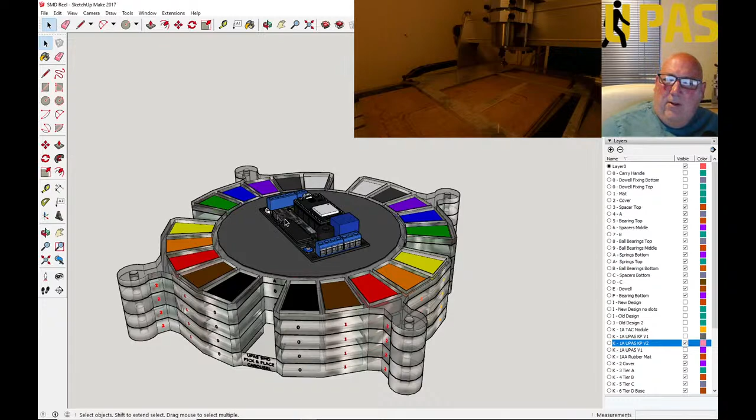It's a dual role device with a mat. Put your circuit board on top, like so. It'll be a blank board, and you can stick your components on, like I've put a few components there.

So in your carousel, you're going to store bits like connectors, resistors, poly fuses, opto isolators, resistors, LEDs, all that kind of small stuff — stuff that you could get lost quite easily or mixed up.

So what you do with this, you turn with these handles here. You move it either way. It's got 4 access points.

So potentially, if you wanted to — it sounds crazy, I know — you could have a small square table with a person on each side, and each person can sit opposite the access here, and you could all populate the same circuit board with different parts, if you want to. Or you could have one either side of the table, or just do it all on your own. But the opportunity is there. This is one of many designs.

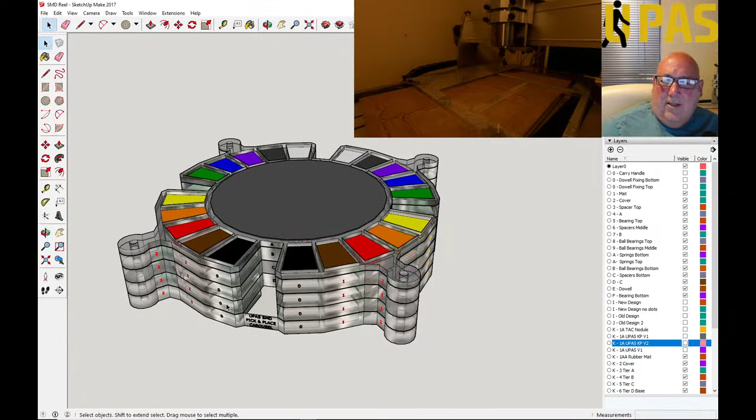Anyway, I've just set up the CNC. I'll select that layer, and we'll just rotate it in case you didn't see. So I'm going to rotate that layer — it's got a ball bearing and a spring positioned exactly where the next one is, and it'll snap into place. You snap it into place. Okay.

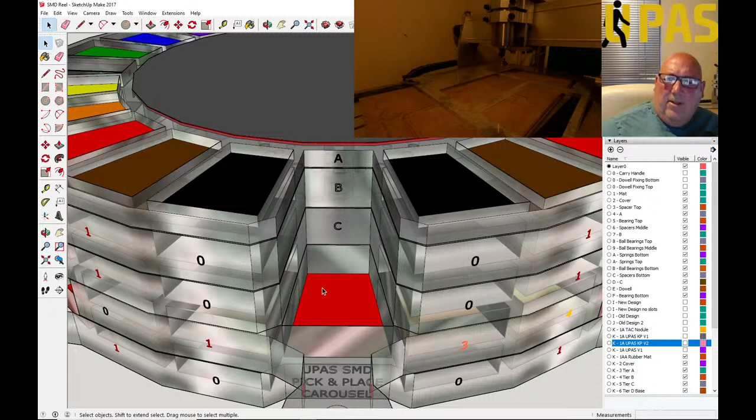So once you've snapped it into place, in there is the bin milled out of the plastic, and it reveals a 10 mil deep bin, by — what have we got here — 18 mil at that end, and 26 mil at that end. So that area, you can fit quite a few resistors, capacitors, LEDs, more than you'd think — you could probably dump a whole reel in there.

I don't know if you'd get 5,000 in there. Anyway, I wouldn't dump the whole reel — I'd just dump enough to last for a few weeks.

So we've got various board houses now — JLC PCB, PCBWay, loads of other ones. It's very easy to get a circuit board made these days. Well, it is at the minute. How long that'll go on for, I don't know, with the present climate, but anyway.

There comes a point where you need somewhere to store your items quickly without having to get all your reels out every time and sort out a few just for one-offs. You don't want too many of these components out at any one time — they're only tiny, if you sneeze they'll blow around, mix up, or you'll just lose them. So it's a bit of an organiser stroke building machine.

You can build it on there. Now, it's based off Unexpected Maker's 3D printed version of it.

That's where the idea came from, and I need one. I asked the question, where can I buy one? I wanted to buy one, but the design files are available. I didn't see them, but they're available somewhere, and you've got to make your own basically.

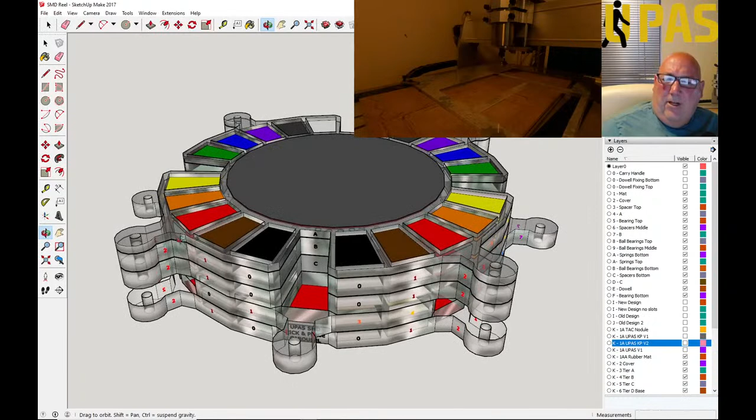But the idea is you get your tweezers, you put your circuit board on, and you turn this, and you just get your tweezers and you pick out your part, you place it, and then you spin the reel. You can spin the reel or move it around, pick out another part, and so on and so forth.

But it gives you, the way I've done it, there's 5 there, 5 there, 5 there, so that's 20. Each tier has got 20 bins.

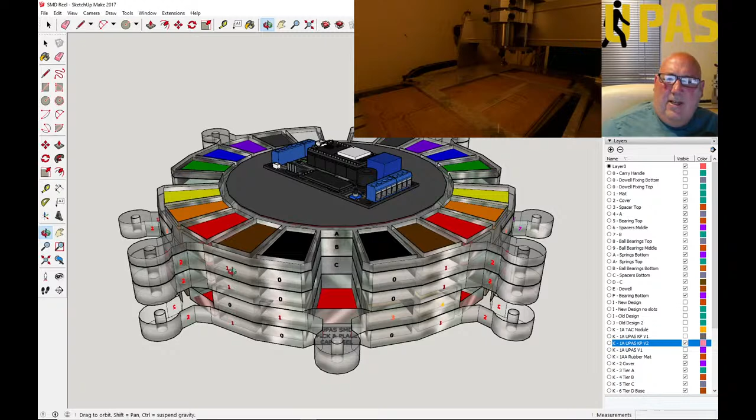And you got another, so there's 80 bins at 10 mil, and then you've got these top temporary ones, so I call it temporary parking, where you can pick out your items out of the big bins, or the 10 mil bins, and place them onto these 3 mil bins, temporary if you want to do it that way.

You could pick out enough to do, say if you're doing a batch of 10, you could pick out enough items from each one to do 10. You could place them where, you know, in a certain order.

This colour follows the resistor colour code, so if you did it in steps, you could say, right, step 0, I start off with such a value. Step 1, I start with another value, and you just go around. This is your anti-clockwise direction, or it's actually clockwise, isn't it, if you look from above? But you know what I mean.

Anyway, all you'll end up with is a clear polycarbonate. I could laser print some different coloured card and stick it in. It's just to illustrate the different bays, really. That's what the main thing is here.

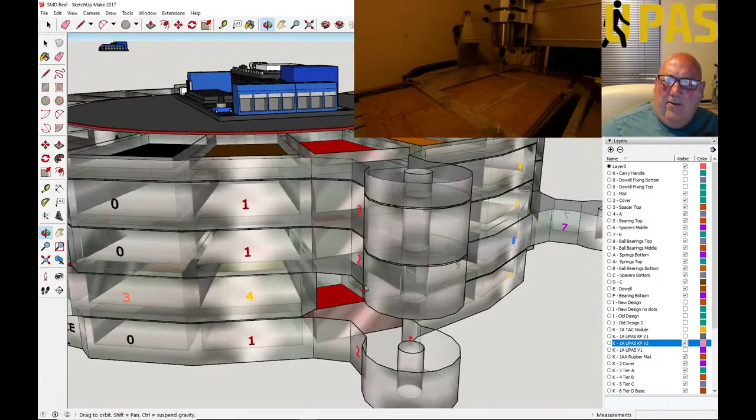So yeah, it does give the ability when you move this to reveal other bays, not from above but from the side. Whether that will be taken advantage of or not, I don't know until we come to the real one and see if we need to do it.

It's not so easy down there, but say if I undid the rotation. Let's get rid of that, I don't want this to take up all this time. So if we move that, if I just move it back one, for instance, and let's move that one, forward one, forward two, yeah.

Right, so you can see what you can get to now with your tweezers. This is on your desk, so you could get into there, and you can get into there, and get into there. So just from a couple of moves, gives you access to different bins.

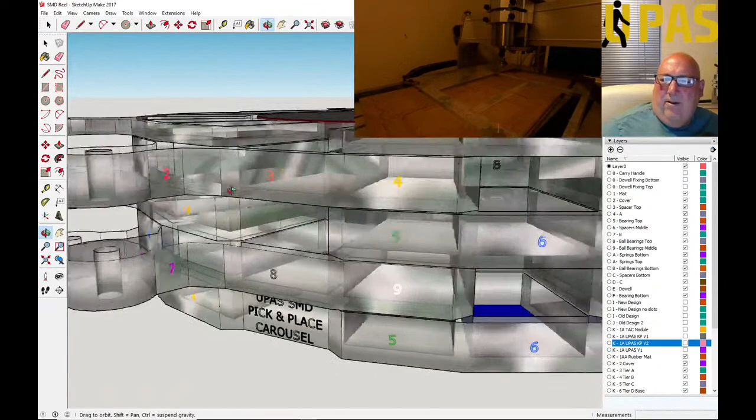Don't know whether that's going to be a good thing or a bad thing. A lot depends on what you're doing. Because it's got symmetry, you can get the same bins, the same position bins available around. So you could generate a pattern anyway. It could even be a game. This could be a game, some kind of cryptic game anyway.

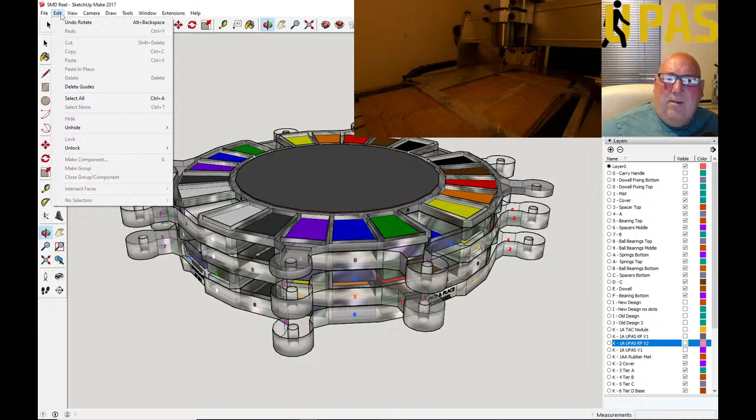Right, so let's put that back as it was. Hang on, I've gone right round too far. Let's get this back to where it was.

And today we're gonna build the first base, hopefully. Don't know how long it's going to take, but we'll give it a go.

It's been very hot in the UK today. I think I've got a bit of sunstroke and sunburn on my head, so if I stop making any sense, you'll know why.

Right then, so up on the view on the window next to my face, that way, you've got the CNC machine. It's a Chinese 6040. I've had it for a while. It's in a bit of a mess, really.

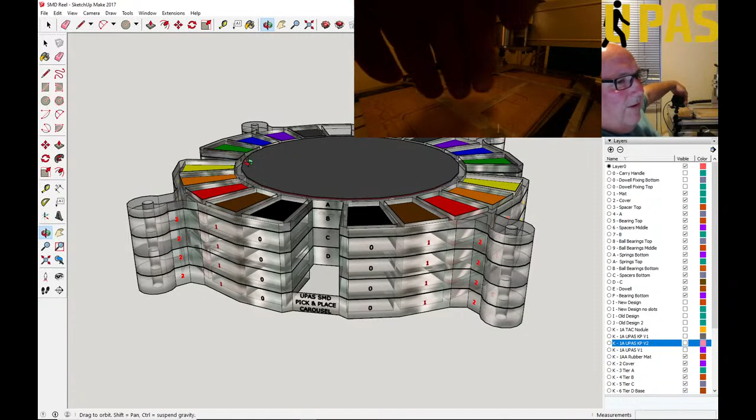Now I've got a bit in from yesterday. I've got a GoPro camera on it. The picture's not brilliant, and there's a bit of a lag. So watch this, my hand's in front - that's the lag, see the lag?

Can't get rid of that at the minute, so I can either get another camera - I've got another rig upstairs in my electronics lab, but I don't want to start undoing all cameras, so I'll just set this one up for now.

Right, there's a bit of scrap plastic on there. Managed to get the bearing to sit in the last bit of plastic I did. I can't remember where it was now. Was it over there? Yeah.

So I've got the bearings - this is the crucial bit, these bearings. They're 12mm wide, the outer diameter is 12mm, the inner is 4mm, and they're 4mm thick. So the top layer of my plastic is 5mm, but the top layer isn't having a bearing. That top one is 5mm and the rest are 12mm, so the rest can take a bearing or two bearings.

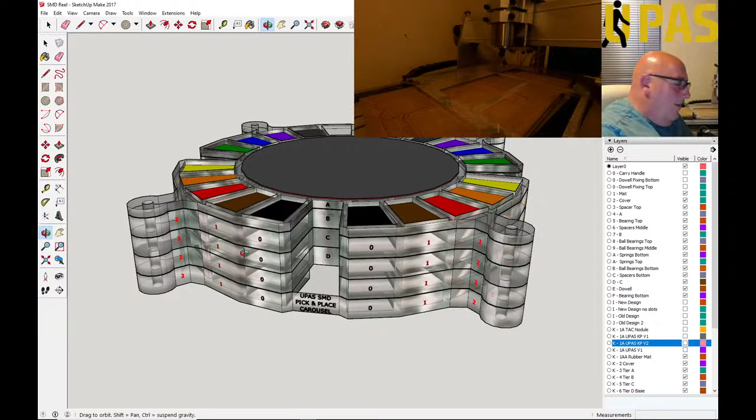Anyway, I've explained all that before. So what we're going to do now is mill out - got to alter the G code slightly, just on the bearing section. So let's just get back over to, hang on.

The models also contain the flattened model ready for creating a G code. I've got them in steps 1, 2, 3, 4. Now that is the first step actually. Now, do I want to go ahead and cut it out? Not really.

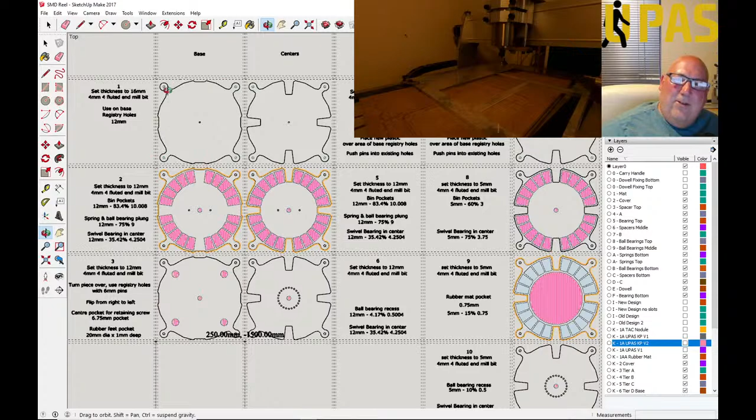Oh no, sorry, I wasn't cutting it out there, was I? Yeah, because as soon as I cut it out, I've lost the clamp. I've got to clamp the plastic down. So the first thing I'll do is create the 4mm hole in the middle.

Now, a bit of a problem with that 4mm hole. That's probably alright there. Probably be fine as it is. So I'll leave that as it is. If it's wrong, I can always go through it with a drill bit and open it up. But I think it's right as it is.

I can either do that because I have changed since I created all this - I have changed the size of the bit down here. 3.90 the bit. It says 4mm on the end mill, the 4 fluted end mill, I think that's what they call them. But in reality, to make this cut big enough to drop that bearing in, I need to make the bit diameter 3.9, so just to give it a bit of overcut.

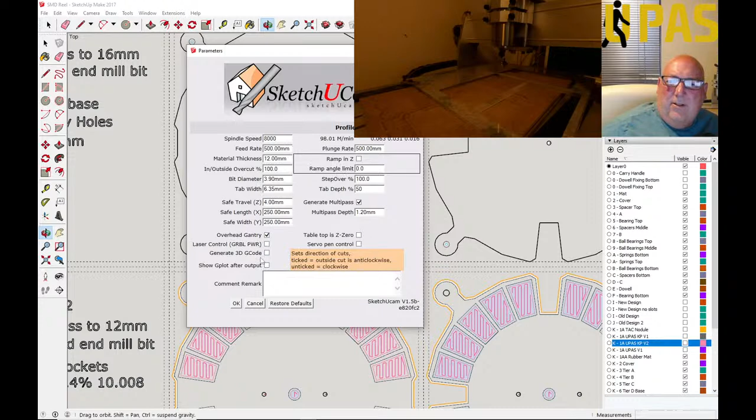So we did that last time, so we're on 12mm here, that's okay. Now I could just go through - I'll tell you what we'll do. Why not? Well, let's do it. I've got to just delete that.

Here we go, it's just a slow process, sorry. Now, click on the rubber, delete that. I'm gonna - not that bit, that bit. No, that's the wrong one. Hang on. That's it, delete that. And now we've got the new bit.

I'm going to place a plunge over the top of that. So I'm going to plunge it - that'll plunge straight down, in steps of 1.2mm, down through the plastic, now 16mm thick. Okay, 16mm thick.

Right, we're getting very thirsty now. Excuse me. Got some ice water. It's been too hot today. I've got a bit of cider in the fridge, but that's no good drinking that in this heat.

Okay, so I've got that in there. It's going to mill out these as well. Now these are 6mm, so I probably need to erase them as well, to tell you the truth. Let's just do them as well.

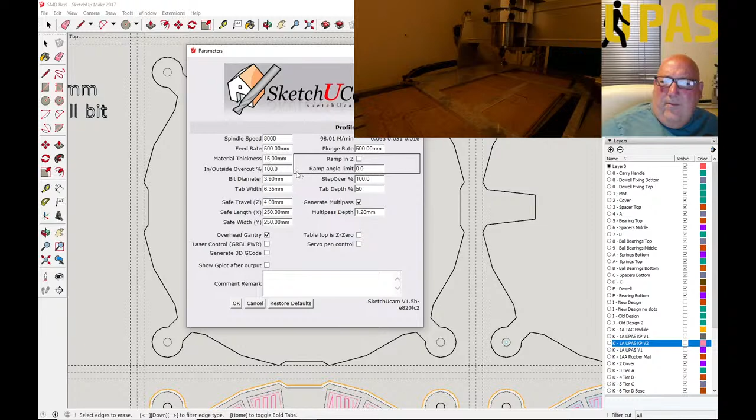I'm having to go over it slightly, so I've done the middle bit. Now I said it was 12mm, but I need to go past the 12mm into the material, so I'm going to have to pretend this is 16mm. Should I say 16? Let's not say 16. Let's say 3mm depth, so let's say it's 15mm thick. 15mm thick, that's it. It's not, it's only 12mm, but I need to go through the plastic into the spoil board.

And I'm going to use these holes as alignment, so I'm going to need to flip it. Once I've milled this out - not at that point, but later I'll need to flip it - and these are exactly the right distance apart, supposed to be. So let me do an inside cut with the new size.

That's 1, 2, 3. The first thing I need to do is mill out these 6mm holes all the way through the material, 3mm into the spoil board. This I don't need to do now, but I'm going to get it out of the way. It's a 4mm hole straight the way through.

Okay, that doesn't matter if it goes 3mm into the spoil board, doesn't matter. So let's do that. That's the first stage. Right, okay, let's get the safe area over top of it.

Okay, that's snapped to the safe area, so I'm going to save that. I've got to go through each one because I created some of this G code with the drill bit set to the right size, but it turned out it needs to be slightly under. Okay, so let's generate the G code.

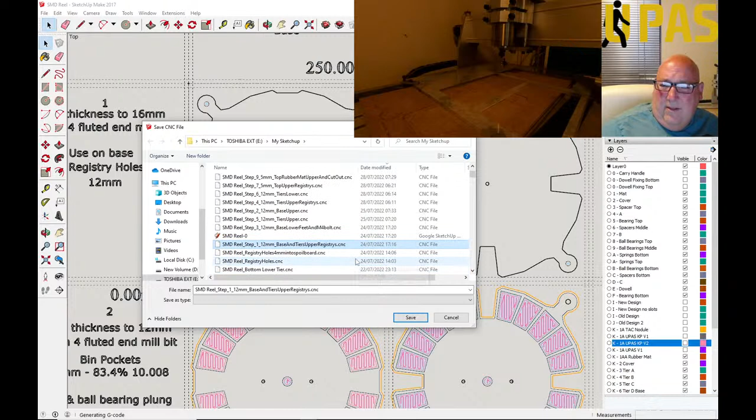I've already got these numbered ready to go, so this is going to be base and tiers upper registry. That's the one. Yeah, that's the one, isn't it? Hang on, yeah. So save that.

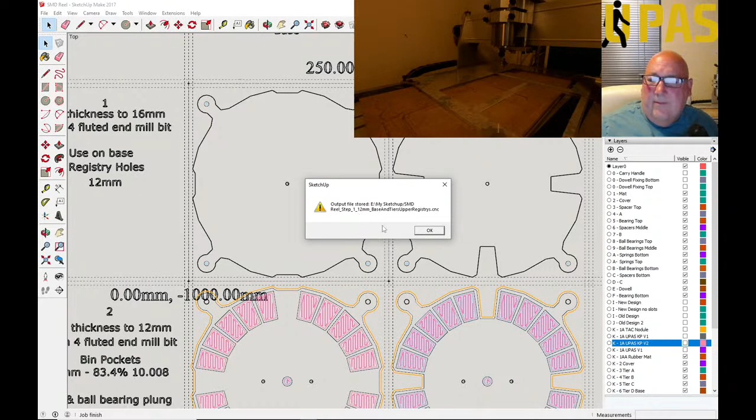Okay, I'm back to square one again, where I need to keep swapping the memory stick. Right, it's created the file. Hello, still there, yeah. Alright, so it's created the file, let me just bring up that. That's okay. Right, I'm going to transfer that file over to the memory stick.

I can do the next one while the one's milling. Well, it won't take 2 seconds to mill one out, so maybe I shall do the two. Tell you what, I'll do the two in one go, why not? Because this one is only a couple of holes, it's not going to take long at all.

Right, hang on, where's my? I've got to find out where I am. Mine's working at slow speed today. So that's the one there. Copy, I'll leave that there for a bit. Let's do the next one, get it ready. Right, this is the next one in the list for the base. Now,

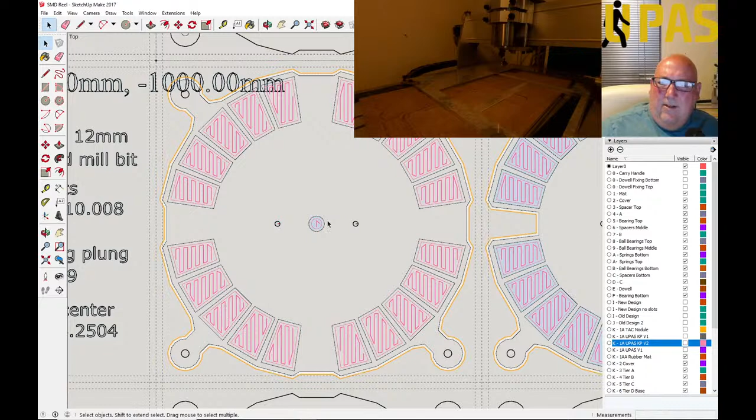Yeah, this is where I need to delete these holes and redo them. Now some of these don't go all the way through. Well, no, none of them do, apart from the outside bit. Now this is the bit, yeah, I'm gonna struggle a bit. I've got to be so careful, because I'll end up milling too much if I make a mistake.

Might be better to split, if you're doing one yourself, split it up into stages. So I've got 2 or 3 things going on here. Got the pockets to mill out, different size pockets. Well, there's 3 different size pockets there. Let's go with it though. Right. These are going to be okay as they are. I'm not bothered if they're a bit tight. Yeah, I suppose you could want them as. Let's go for it, let's just go for it.

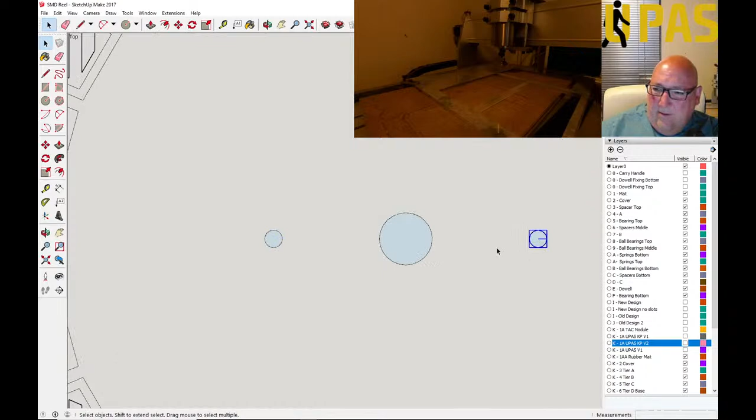Right, so I'm going to select all this. I've got to just rub out the G code side of it. Which means I've got to take that out of there. I've got to take that out of there. Now, is that the one? No, that's the one, and that's the one. This is a bit more complicated because I've got to delete these. Alright, that's okay, it's just going to take a little while.

Sorry, let's talk about something else.

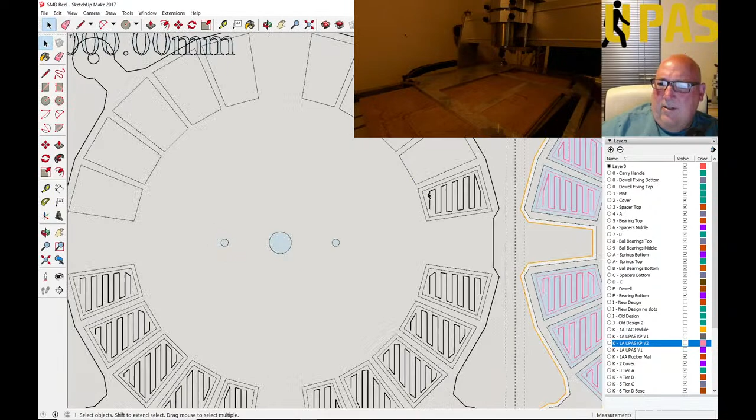So, anyway, I've picked up a bit more wood for my 3D intercom project, which I've had to put on hold while I'm building this, because I need this at some point, so I thought let's get it out of the way. So I've put on hold my ESP32 audio video intercom project. That's getting a few views. I'll get even more when I start integrating the software and firmware on it, hopefully.

Right, so I'm going through, I'm just deleting this. These are the tool paths that the Phlatscript creates when you... I'll show you in a minute when I start putting them back in again. It does it all for you, it's just it doesn't get rid of it for you. No trouble, it puts it in for you in one piece, but getting rid of it is slightly tricky if you've got lots going on.

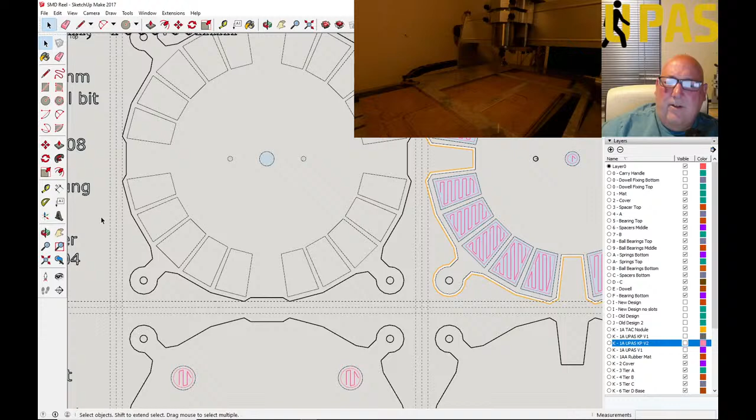Right, have we finished? Yeah, we've finished. Right, so that's your blank, and we're going to save that there.

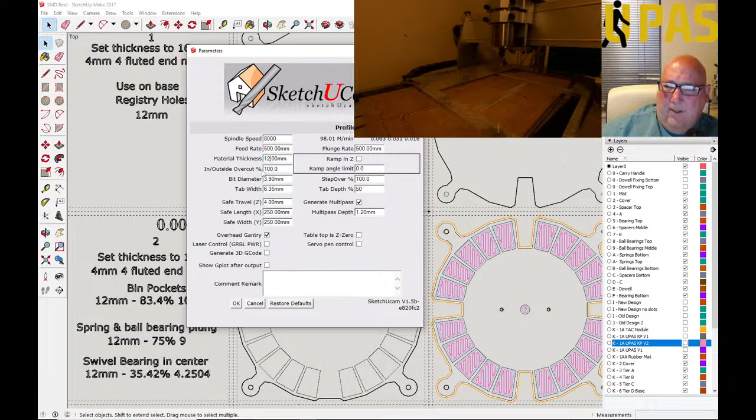So what I'm going to do now is put on my pockets. My bin pockets are 83.4%, and they're 12mm deep. Now I'm going to have to change the material to the actual size, which is 12mm, not 16. So that's going to be my 12mm.

I've already done this one. This will be called a different file. So what I need to do now is, let's get rid of the spring and ball bearing first. Now I need to go down 75%.

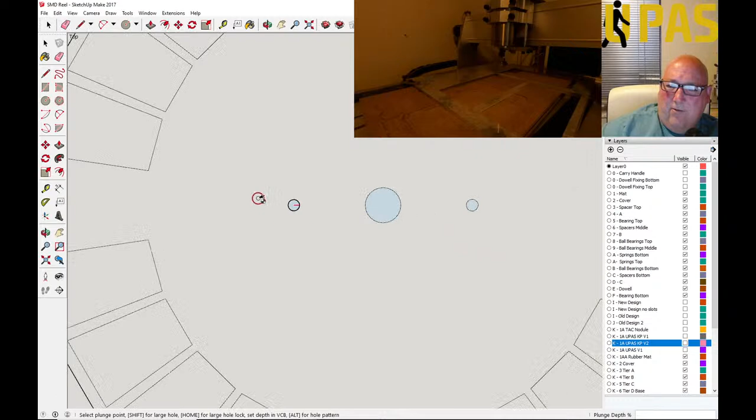That'll give me roughly 9mm. So I'm going to plunge here. This is for my spring to drop into and a ball bearing. If you haven't watched any others, this doesn't go all the way through the material. It goes 9mm through, so there'll be 3mm at the bottom of material left, and I'll be able to put my spring in.

To tell you the truth, it probably doesn't need to go down 9mm. I thought I'd give it 9mm, but it probably only needs to go down a few mil, about 5 or 6mm. We'll keep it at 9mm for now.

So they're done. The next one is a swivel bearing in the centre. This is the one we messed around with in the test plastic behind me, so we got it right. This one needs to be a pocket, swivel bearing centre 35.42%, and I'll click that there, and that's that one done.

The next is the pockets. Let's quickly save this. Now the bin pockets - I could take this opportunity now to make them 11mm, but I'll stick to the design.

So these bin pockets need to be 83.4%. 12mm minus 83.4% gives me 10.008, thereabouts, so that's close enough. I have to do percentage of thickness on this software. I'd rather just do it by the mil, but for some reason they've gone this way. There must be a reason they've gone this route with it.

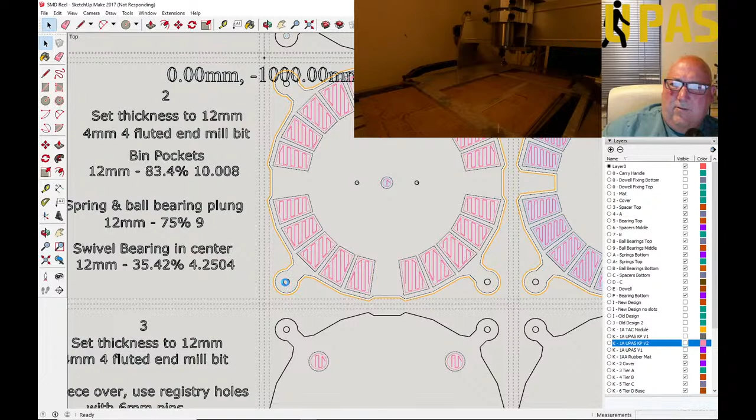Save that. We don't need to mill out these because we've already done them. We've already done these on the one in front, stage 1. We did the holes in the corner.

So that's everything we need there. So let's just bring down the safe area over there. Okay, and save it. And we want to export it. Yeah, so we're going to do that bit first.

Now, do I need to turn it over? Shall I do the next one? That's the base finish then, isn't it, once I've flipped it over? Tell you what, we'll do that stage and we'll flip it over after.

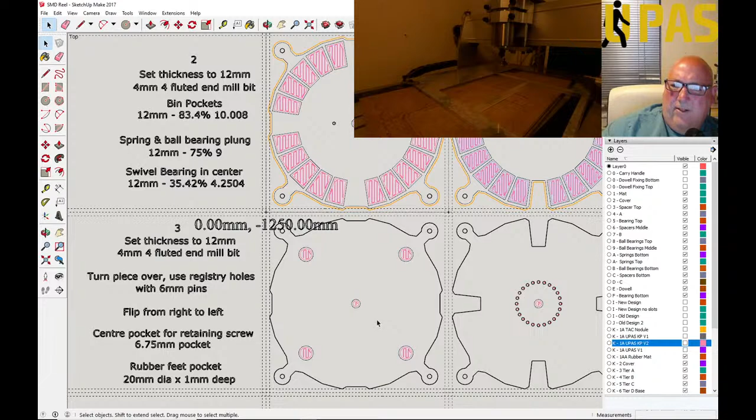Right, that's the material clamped down. 1 and 2 is just clamped down with the normal clamp or vacuum table. If you've got one - I haven't got a vacuum table. And this piece is underneath of that, so it has to be flipped, so we'll leave that off for a minute.

Right, now I've created the G code, did I? Can't remember. Let's pretend - no, we didn't create the G code. So this will be step 2, which is down. Where is step 2? Don't see step 2 on here.

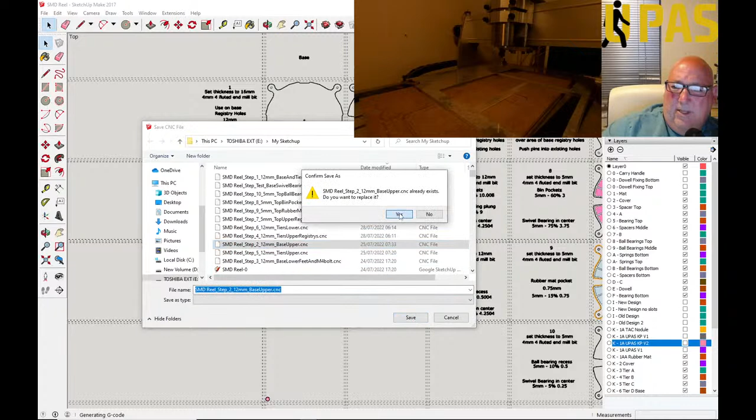There it is, upper base. Yeah, so that's upper base. Right, okay, so we're going to save on the top of that. Okay, so now we're going to go down to the...

Oh, it hasn't finished creating it yet. Have a sip while I'm waiting.

I had a look at the YouTube analytics, and we've got some views on this project in Indonesia. I don't know whether that's Australia or what. Anyway, some in America, some in the UK.

Right, okay, so we've got that. Let's just copy the files over. That one there... oops, that one there, and we want number 2. Where'd you go? Number 2. Can't see number 2 now. Why not? Can't see it for looking. There it is - yes, they both got the 1st to the 8th.

Okay, so I'm going to copy them over to the memory stick and overwrite the ones that are on there. Okay, we're getting closer.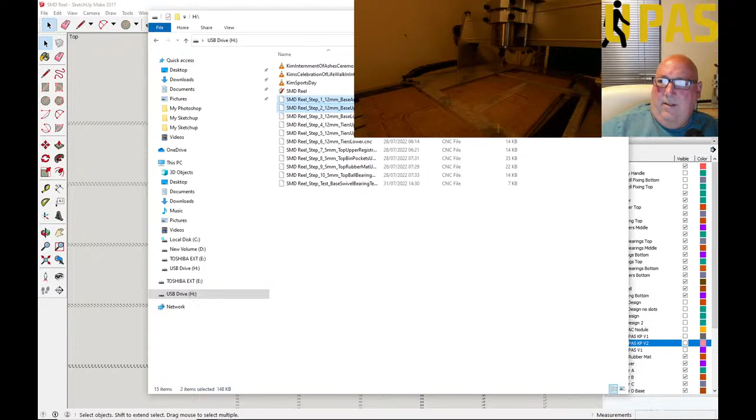Before I go much further with that, let's quickly go over to the online viewer, load in those two bits of code. Let's just see if it's even close to what we're expecting. That's the one there - alright, so we'll have a look at that.

So let's run it. The tools will pick up, go up to the top, and then it's going to mill out the 4 mil hole, then mill out the 6 mil holes. It's going to go down 12 mil and keep going another 3 mil into the spoil board. It'll carry on - looks about right, doesn't it? Yeah, it looks right, so we'll leave that one.

Let's open up the next one. Number 2, where are you going again? It's right at the top. Okay, let's load up this one.

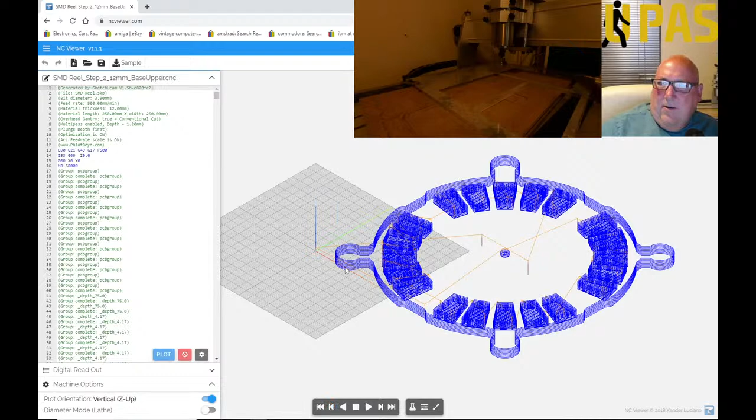You can see there's a lot more going on with this one. So this one mills the bearing pocket for the top, all the bins, and then when it's finished it'll go around and cut the outside up. Let's just see if it's going to do something like that.

Alright, yeah, so it's milling the 2 spring holes, and it's starting on the pocket. It should do all the pockets first, and the outside cut is the last thing it'll do.

Now I've got no tabs on this piece, so I've got to be careful. Actually, I might put the pegs in when it's finished the pockets and is about to do the outside cut. I'll let it cut halfway, then I might have to pause it, put some pegs in the holes it's already drilled out, right through to the spoil board, to stop it moving - because as it cuts the last final little piece it'll try and shift, and this is normally where my stuff goes wrong. It shifts and then the bit just mills into somewhere it shouldn't be.

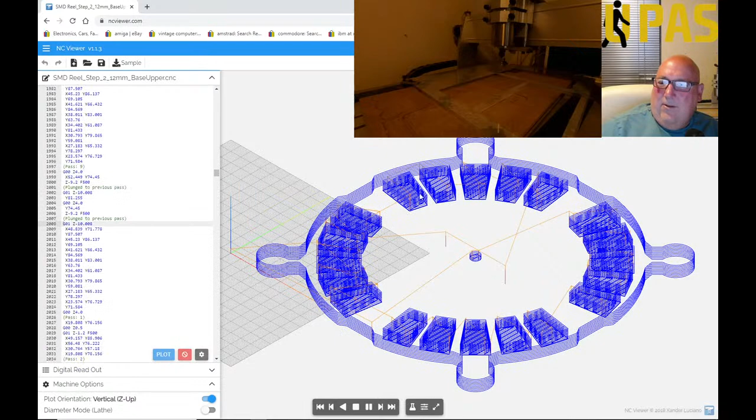Okay, so that looks good. We'll stop that there. Right, so we're done with that for a minute. Let's go over here - do you want to have a look at what we're going to be doing? We're milling this bit, yeah.

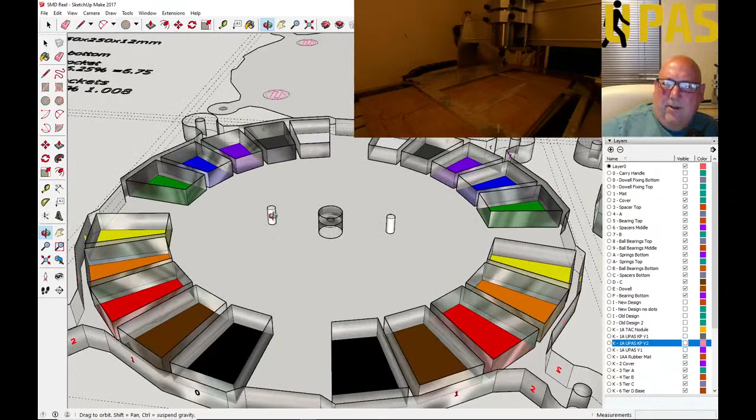Right, this is the bit we'll be milling here. So we're going to do these spring and bearing holes, semi-holes, whatever they call it, that top bearing and all the bins, and then cut it out. But that's the second one - the first one it's going to do is, well, it's not in the right one. The first one it's going to do is that.

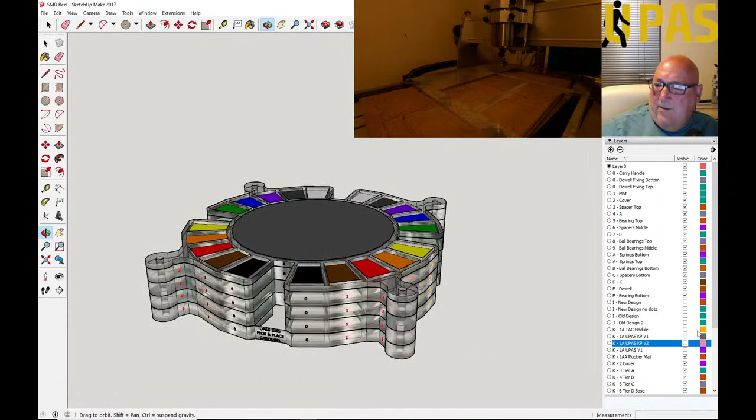Let's just do it - tell you what, let's just do it. Let's get that up in the picture. Let's get rid of some of the stuff so we know what we're milling. So we're not doing the cover, we're not doing the mat, none of the tiers, and we're doing the base. Right, so we're doing the base - there's the two holes for the spring and the ball bearing, and that's what we're milling today.

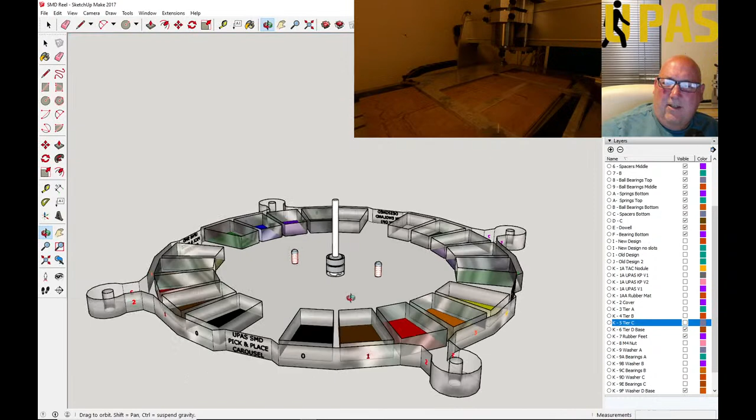Hang on, is that even part of it? Yeah, yeah. So we're milling that - there's two bearings clamped together, holding, and we're doing the top bit today, and the pockets. So we should have something resembling this fall off the CNC table in a while.

Okay, so right, I'm going to take out the memory stick, transfer it over to an XP computer.

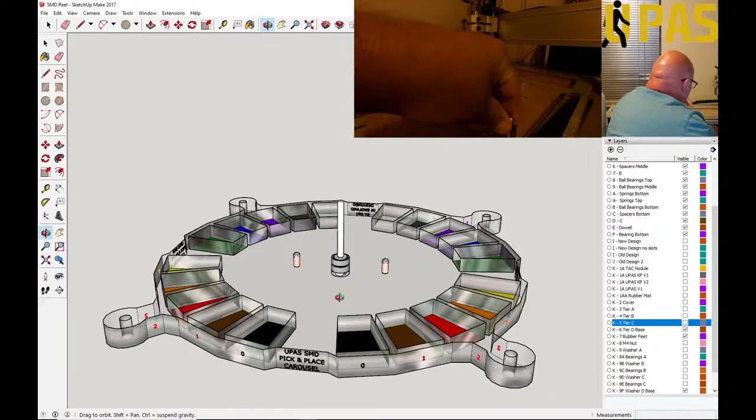Okay, I'm going to hold it there. Now what I've got to do is get the Allen key and take out the scrap piece, just undo the scrap piece. The other stuff's 12mm thick, so I might have to mess around with the clamps here. Let me get this scrap piece of board out, get this polycarbonate out of the way. So you'll have to bear with me for a second or two. We need to unclamp that now.

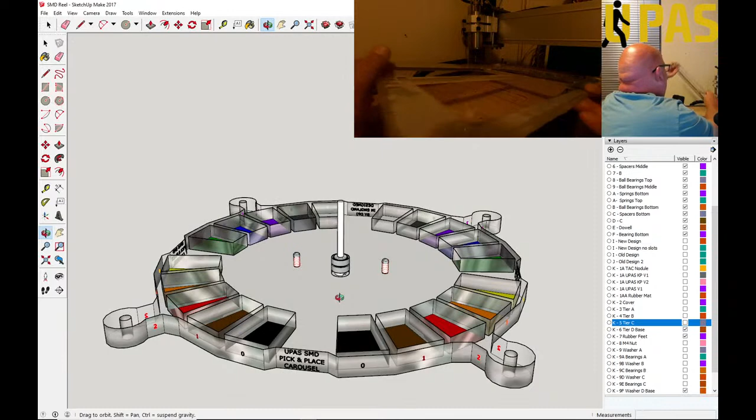Right, the scrap plastic is out. Okay, let's get rid of that a minute, get rid of this temporary plastic. I'm going to turn the vacuum on now, so just got to hoover up the bits off the table bed.

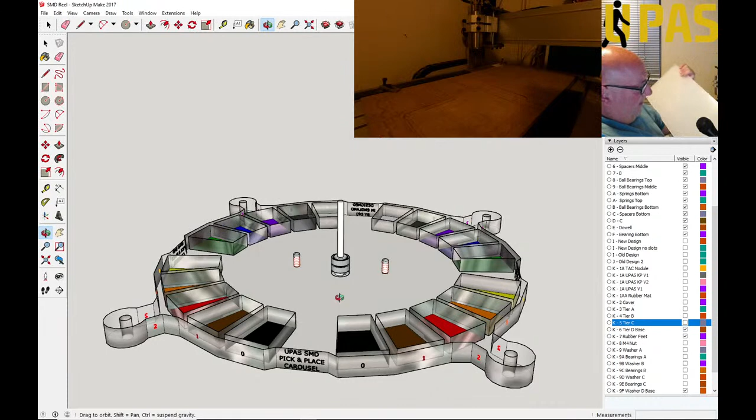Okay, back, slightly back. Right, we get the bit of plastic, first bit of plastic. Like I said, this was here, it is, piece of plastic. I don't even know if it's clear. It might be, it's probably not clear. It doesn't matter. Yeah, it's not clear, I don't think. Almost, it's good enough.

This is 600 mil long by about 250 wide. So what I'll do, I don't really want the plastic on it, really, the plastic will probably get around the bit and foul it up. So I'll tell you what I'll do, I'm going to peel it off. I haven't peeled this off yet. So it's just a bit of scrap stuff I picked up cheap, very cheap.

Let's just take it off. I'm just taking the plastic off. I don't want it to foul up on the milling bit. So we'll just take it off.

You can see it's sort of semi-transparent. Don't know what it's used for, no idea, there's no markings on it. It could be acrylic, it might not be polycarbonate, but it mills well. Actually, I've never tried milling it. I was milling some scrap plastic, probably nothing like it. But anyway, let's just get it all off.

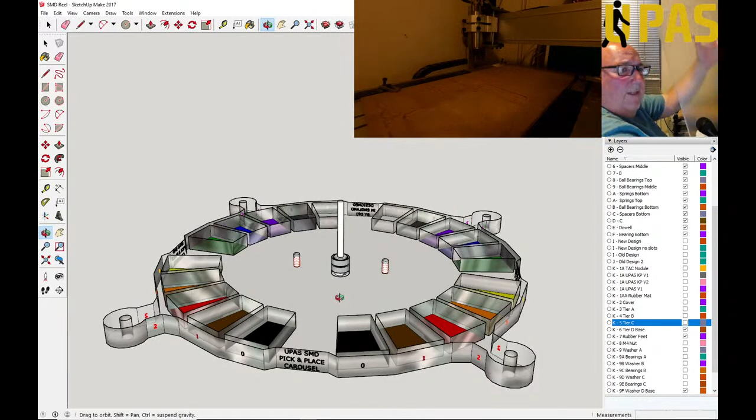Ready, there we go, there's the piece. What's it look like when I'm through it? Don't know what it is. Nice bit of whatever it is, yeah. Okay, put that on the table. It fits on my 6040 CNC quite well, that does.

Alright, my one will only mill about 585 to about 390, 380 something. So, but today we're only milling 250 by 250 in one section.

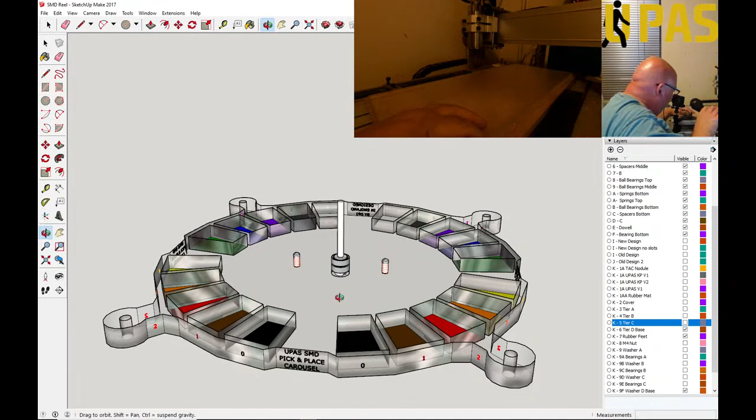Right, here we go. I've got to clamp this on there now. Now, I don't think these are going to be able to clamp it, to tell the truth. And yeah, going to be a bit awkward, that is. 600, so yeah, I've got a bit of gap either side. I can either clamp it either end, I'll probably have to clamp it either end actually. Yeah, I'll give it a go.

So if I put my clamp in there, you can't see what I'm doing. I can just about get that. Yeah, I can just about get that. Right.

Oops, all my power supplies are going on the floor. Slowly, the weight of all these plugs hanging off. Right, yeah, it's a terrible... it's a terrible thing. Yeah, need a workshop, really.

So I've got 43 minutes and we haven't done anything yet. Anyway, right, let's get this other one out.

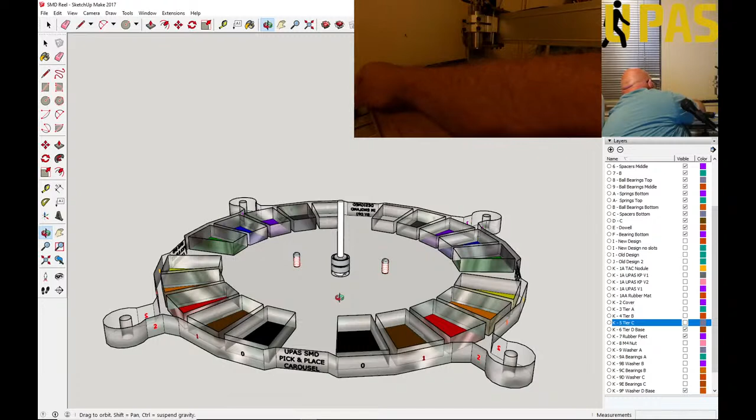Oh, that's come out of there. Why does that one go on? Yeah, I might need some different size stuff here. Should I put one in? That's not really matching out. Why is that? It's getting the right stuff to fit it. That one fits. So why does that one fit?

So I'm just trying to sort my clamps out. I could do with a vacuum table. Well, that would be a noisy thing, wouldn't it?

Okay, so that's okay, that's weird. Anyway, it's very hot as well, very hot today. Okay, so I probably won't be able to tighten these up too tight. Oh dear, I mean, I shouldn't have to.

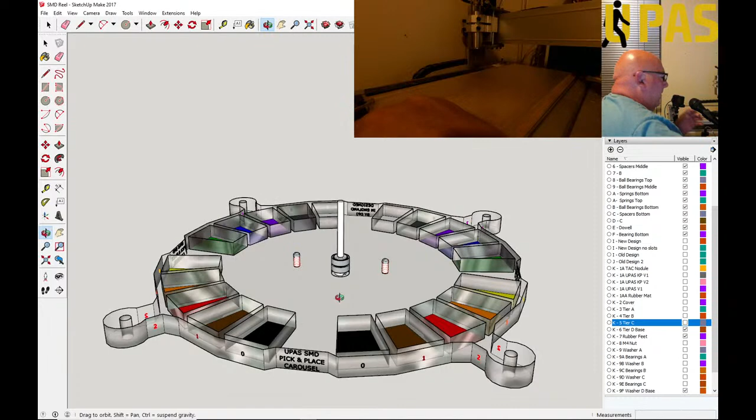I shouldn't have to tighten them too tight, because I'm not going in deep with it. I'm only going 1.2 mil, so I've just got to hold it still, really. So, anyway, let's get this stuff done.

Doesn't actually reach there, so I have to come out of there, put that into the back, and that's a bit of a problem. It doesn't reach over my spoil board. That's a fail, isn't it? That's a bit of a fail. Yeah, I've got a bit of a fail going on here, because my material's smaller than my spoil board.

How am I going to clamp that down? The spoil board is too long compared to the material. My clamps won't reach over it. There always has to be something, doesn't there? Yeah, what else can I do?

I quite like it there, so is there any way I can do it? Hang on, might be able to space it out a bit. No, I can't space that out, can I? Let's just got it there. No, it's not going to work, is it? It's not going to work.

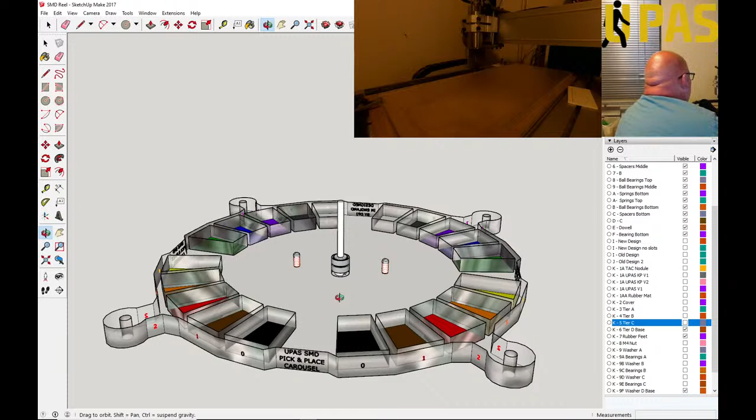So, Plan B. What's Plan B? I don't really know what Plan B is. All it's got to do is mill out 4 holes, but I've got to hold it still in the meantime. Plan B, I tell you what, Plan B will be cut the timber down. I don't have facilities to cut timber down at the minute. Not readily available.

Not in a live stream. Anyway, right. So what do I do? Let's have a think.

I could hold the one side. This is not going to work, is it? If I've got to hold it like that. Okay.

Plastic. Oh, what about if I mill out this over top of the old plastic instead of that? Would that work? That'd make a noise though, wouldn't it? So close and so far. So close and yet so far.

Another drink. Yeah, not really set up. Not set up at all, really.

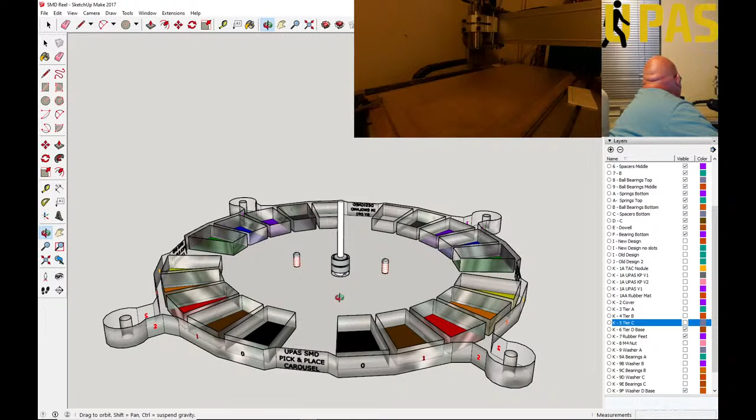Right, I'll have to just tell you what I have to do. I have to clamp it from the side. So I'll go back to Plan Z. Plan Z, clamp it from the side. Just clamp it from the side and try and hold it down. God, that's terrible. Right, okay, let's go with that premise.

So I've only got it. I can sort that out another time. So wind these down. Let's get that there. Get that one there. Yeah, it's a bit of a nightmare. Everything I do is a nightmare. Anyway, right, so let's get that to there.

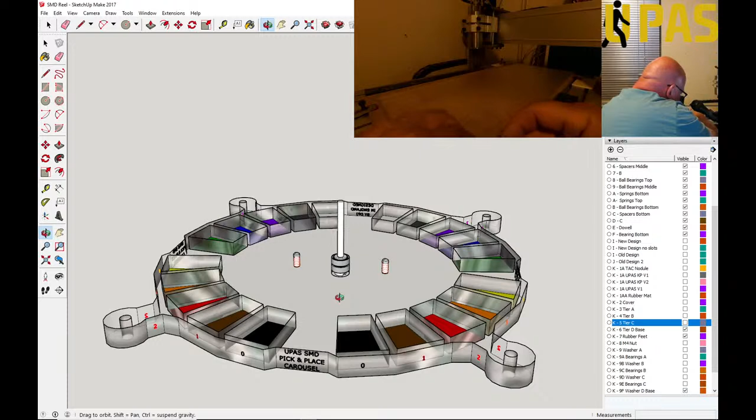So we're going to clamp one side of it and I'll have to press down on the other side. Well, it's going to move, and if it moves then my piece of material is done for. Right, so that's going to go there. I'm going to tighten that up on there.

Actually, I can get 3 sides, couldn't I, if I was clever? Yeah, if I'm a bit clever, I can get 3 sides here. 3 sides is better than 2 sides. Right, let's slide that down there. Yeah, that's it. Yeah, I'm going to get 3 sides.

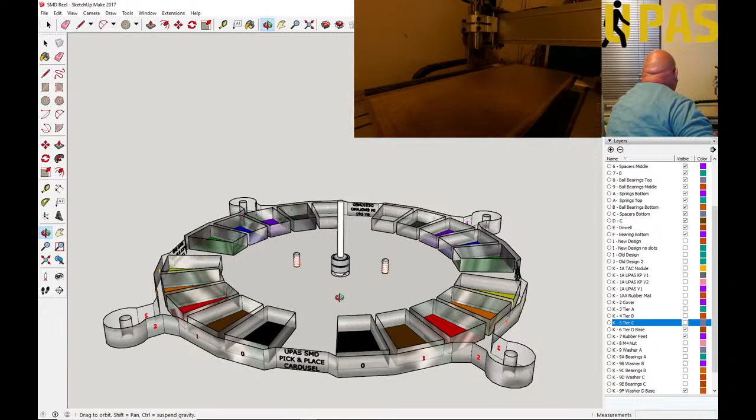Whoops. Blooming hell, they're letting anyone on YouTube these days. They'll probably ban me after this.

Right, let's get that on there. I wonder why that one's shorter. Why is that shorter bit than the other bit? It's like these are different sizes. Weird, yeah, I've got different size threads here.

Yeah, isn't that? Yeah, nightmare. Nightmare scenario, right, okay. Alright, let's get that up there. That's it. Okay, oh dear. Just want to add an extra clamp capability to it.

Right, so I've got something like, and I've got to make sure that we're lined up as well, because I haven't got much play on this. I need to be lined up with something or other. Right, that's lined up with that. Oh dear me, struggle, struggle. Torture, torture, torture.

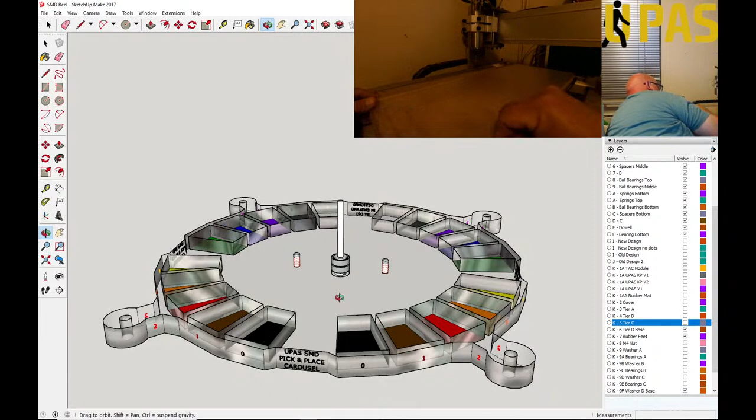Right, here we go, get it lined up. Come on. So lined up with all that down there. Is that about right? Sort of. Okay, that's pretty lined up. Torture, torture, torture.

Anyway, he's got it in for me, because I was once working on a control panel on a site. There wasn't a cloud in the sky, and then came a cloud and stood over me while I was working, hailed on me. Yeah.

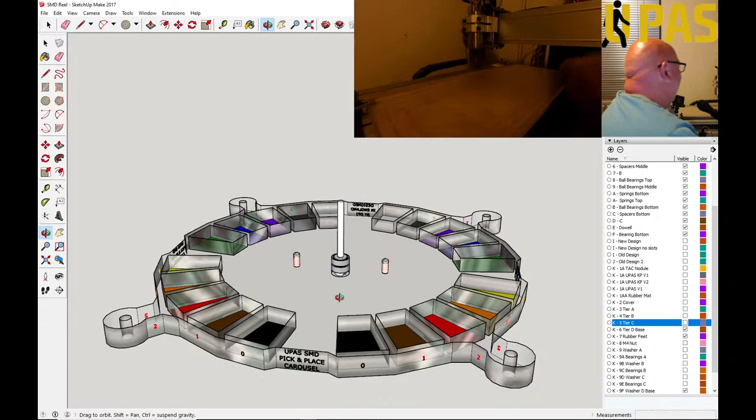Nightmare. Anyway, right, so I've got it sort of held, and I can move the thing, and hopefully it's not going to pull too much, because it's going to cut it before it needs to pull it. I'm going to tighten it a little bit with my Allen key just to give it a bit of pressure. Sometimes tightening it too tight starts to warp the material, so you don't really want that sometimes, but I'll give it a little bit.

The main thing is you don't go through to your aluminium CNC bed, just go through your spoil board only. You can go through your spoil board, but don't go through into your bed. If you go down into your bed, it'll end up looking a right mess after a while, like a bit of Swiss cheese, full of holes in it.

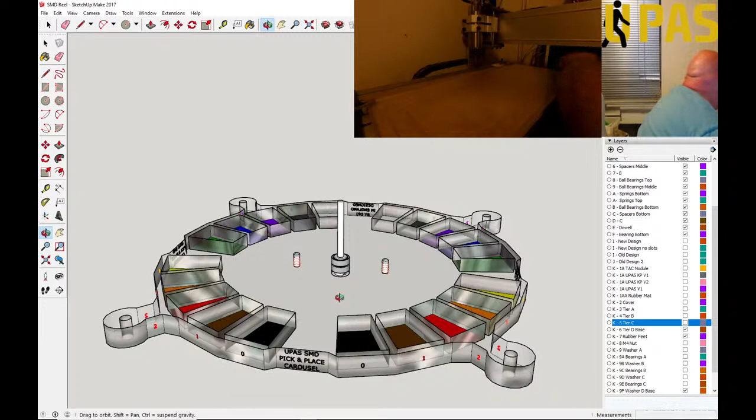Okay, that's going to be about it for that. Alright, if I'm still streaming, it'll be a miracle after knocking all these power leads around. Anyway, right, I'm about ready to... what I shall do now.

You can't see this bit. Shame you can't see this bit. Anyway, right, you can see the milling. That's the main thing. Right, I need to reference.

I've got 600 mil, I need 2 lots of 250. That's 500 mil, so I've got 50 mil at either side to play with, sort of. So I need to bring this, I need to bring the bit... let's just go up a bit.

Alright, so I'm going right to the edge. I've allowed 5 mil on my design. I need to come right over about there, so it'll give me 5 mil. It'll start milling, I don't go any further over.

Now I want to go to the edge about there. I'm putting the centre of my bit on the edge of the material. Right, I'm just going to feel that there now, and I'm going to send my Y all the way across, all the way back now, because what I'm trying to do is see if I'm lined up at the back. The last thing you want to do is start milling off the end of the plastic, which that is doing a little bit.

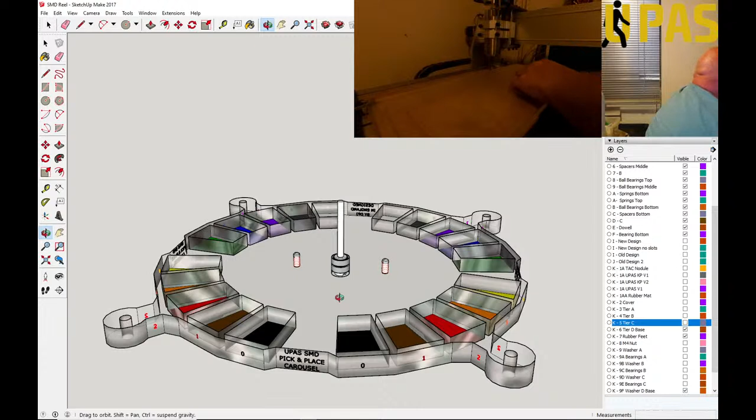Okay, it is sort of doing a little bit, so I've got a bit of play. So I'll leave it there, that's fine. I've just brought it over a tiny bit. Right, I'm gonna go back. Yeah, no, I'm gonna say that's my absolute minimum there. I'm gonna X and Y it there.

Zero the X and Y on the soft limits. Right.

Okay, my Z now, I want to do my Z in the middle. So I'm gonna come back. It's gonna be 250, half of 250, 240, so it's 120. So I'll come back 120, 125. Right, that should be centre where that is now.

I'm going to bring it over 125. Alright, I'm 100 roughly, and I'm going to drop it down.

Now I just want to touch the material, and I want to get a piece of... I can't find it, what have I done with that? A piece of paper. And I don't want to be able to put that in.

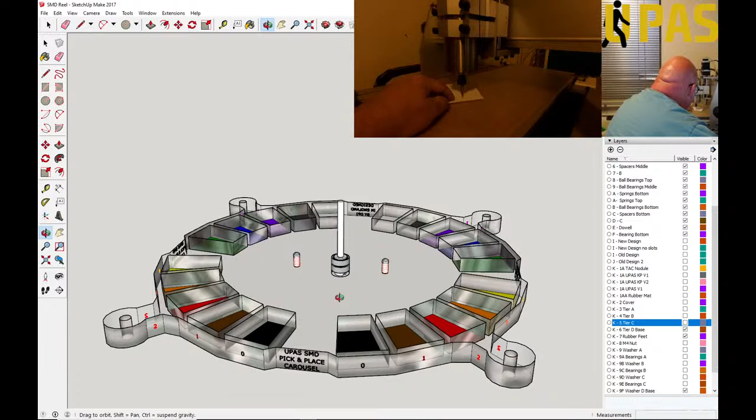I want to go slightly lower than I think I want to go. Let me just go up a tiny bit. Alright, so that's that, I'll lower it slowly. I'm just inching it, very tiny bit.

Right, that's about it I think. That's a little bit too slack. That's a little bit too tight. A little bit too tight. A little too tight.

Right, I'm going to do it. Hang on, it's too tight still. Let's start a fresh bit. Too tight. Yeah, that's going to be it.

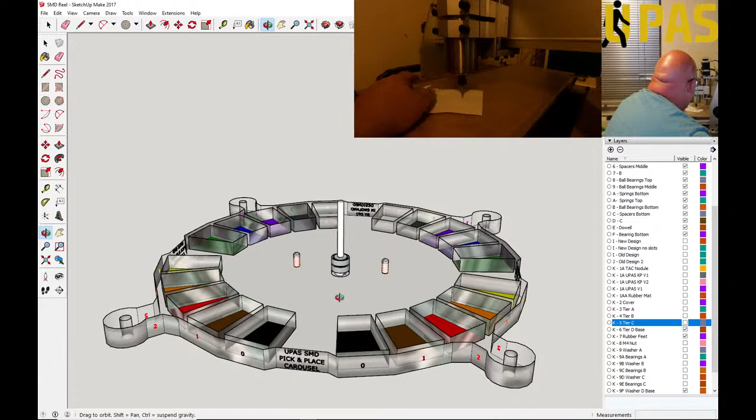About there, right, I'm going to do it there. So I'm going to reference the Z there. Okay, I can still spin my paper, it's just dragging, see that? It's just dragging. Okay, so I'll get that out of the way.

Right, I'm going to go up, I'm going to reference it, go to Z. Right, so this is my XY zero position. My X, Y and Z on my soft limits are all zeroed out. Okay.

So we're going to have a go at that, I think. Yeah, right, it's time to start the spindle up. Yeah, time to start the spindle up. So I'll tell you what, let's load some G-code first. Load the G-code, and we want to come out of that, back into that. Right, so we're going to load that one.

Regenerate the toolpath. Okay, here goes nothing then. Right, everyone ready?

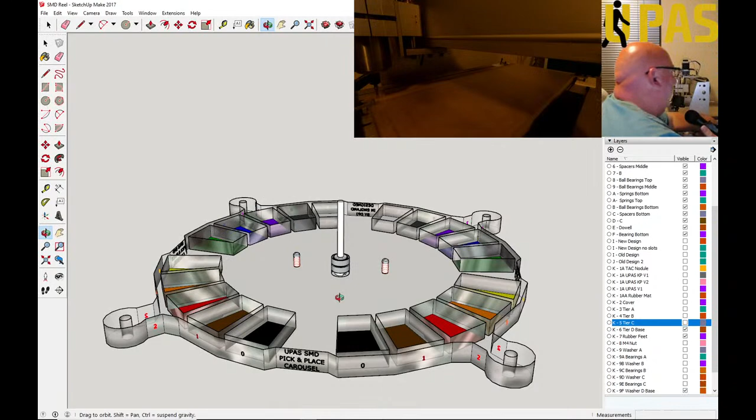Let's plug in the spindle inverter supply. It takes a few seconds to pipe up. There it is.

Okay, I might have to pulse the vacuum on and off just to get rid of some material. Sorry you can't see the screen very good.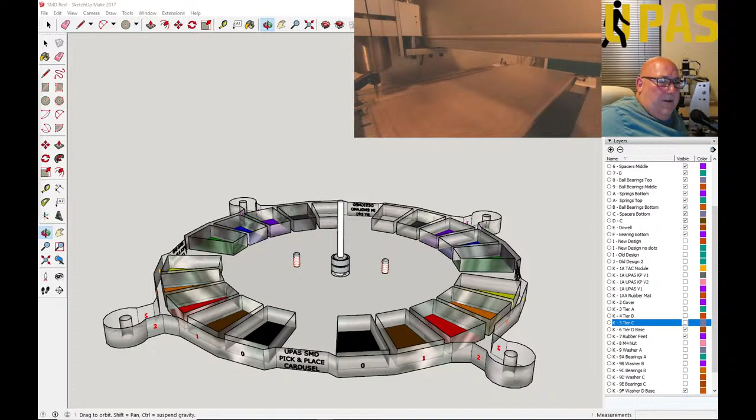Okay. Right, so we are in fact ready to go. Let's turn the spindle on. So we see what a disaster this is going to turn out to be. Right, let's go for it.

Regenerate toolpath. We're already set. Here we go then. Let's see what happens. Ready? Cycle start. So, yeah.

I'll get ready on the stop button. Now this is drilling the 4mm hole for the thread. Supposed to be.

It's gone through. Should start. Hopefully it won't go all the way through to my bed. No. Right, it's going to do the registry holes now.

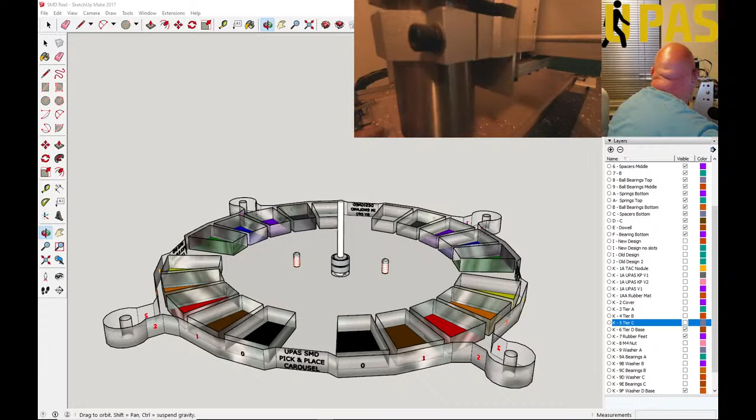The bits of plastic are dropping on my hand, it's quite hot. Alright, one more hole. For these small bits I don't really need to get the vacuum out.

Alright, stage 1 is complete. So tell you what we'll do, I'll just try a bolt. I'll tell you what, we'll move the gantry. Move the gantry back. Okay, that's out of the way.

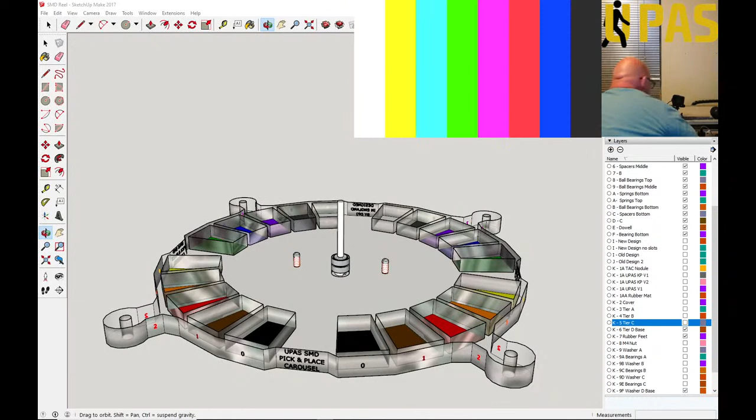I'll get the vacuum out, we'll just vacuum. I'll turn the spindle off a minute. Alright, spindle's off. Let's just get the vacuum out. Okay. Sorry about this, but it's got to be done.

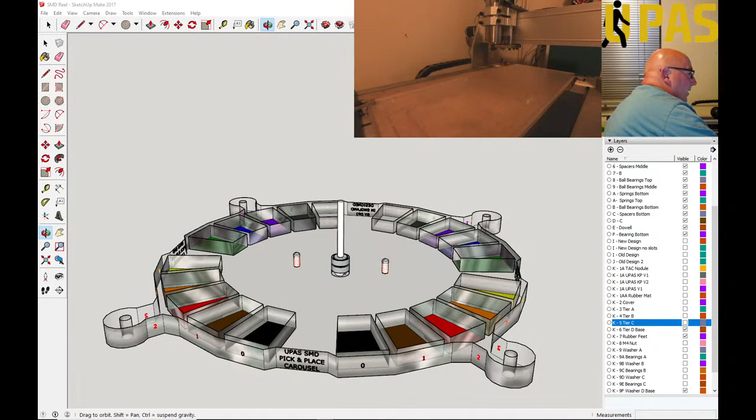Okay, right, it's looking okay. I tell you what, the proof is in the pudding, or the test. Let's pop a fixing in one of the holes. It drops in. It drops in.

So let's see how far it goes in. It goes in that far, which is 3mm into the spoil board. So that's the fixing there. So I've got my 4 fixings. I won't put them in yet.

So we are ready to mill out the second stage. Let's load up the G code for the second stage. Number 2, upper base. Okay. Now this is the one that's going to take a while.

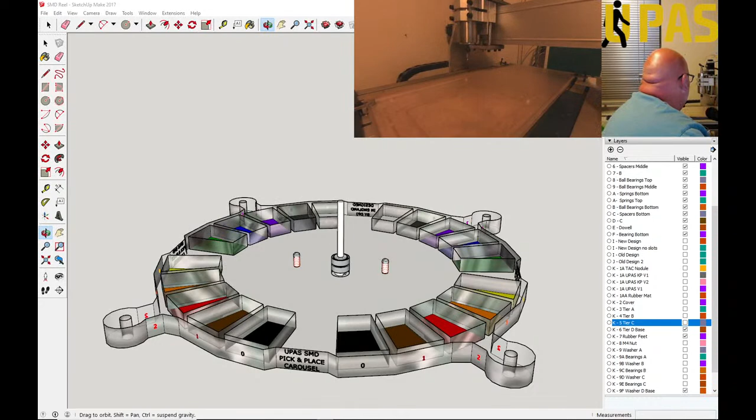Right, I'm going to send the milling head spindle back to Z, back to 0. So off it goes, back to the start position again, and hopefully, if everything's gone to plan, this will carry on milling exactly in the right positions. If everything's gone to plan.

It just certainly looks like it has. If not, I'll need to go and find more plastic from somewhere. It's not the end of the world, but right, I'm gonna go for it. Ready? Spindle on again.

Now this is going to take a while, this one. I think it used to tell me how long was going to be left, but I'm not sure. Or was it how long it ran for? Right, I'll regenerate the tool path again.

Okay. Right, here goes nothing. We're going to go for it. Alright, I will have to keep going at it with a vacuum to empty out the pockets once it starts doing the pockets. Right, here we go. Starting. Ready? Nothing else to do.

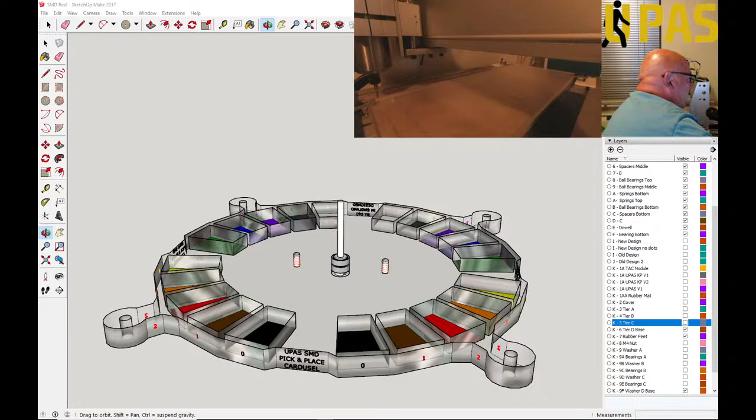Let's hope I don't set fire to anything with the heat. Right, it's doing its own position. I'll get ready on the vacuum. I'll have to do intermittent vacuuming.

Alright, it's doing the ball bearing and spring holes. It is moving a bit. The gantry's sort of moving a little bit, but it's not that critical. It's these plunge holes, they're a little bit fast.

Right, what's it doing next? Pockets now. Right, it's doing the first pocket.

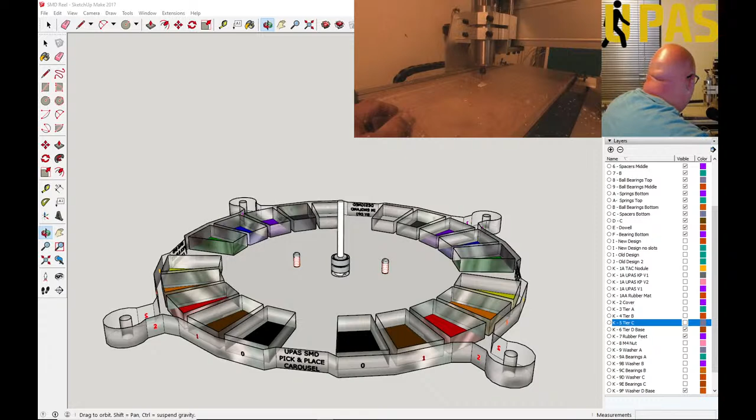Yeah, so make sure it's doing 1.2 mil a pass. This could take a while, as you can see. Really, my camera should be over that way, really, so never mind.

Oh, we've just got to let it get on with it, really, now, you know. Could it keep hoovering it up, but it's just going to go everywhere anyway. Yeah, I don't know if I want to get the hoover out every few minutes.

It's done the first part of the pocket. It looks a lot smaller than what it does in real life on the drawing. Oh well.

Yeah, I can smell the plastic. It's a weird oily plastic, this is. I suppose I should have got a fire extinguisher ready, I suppose.

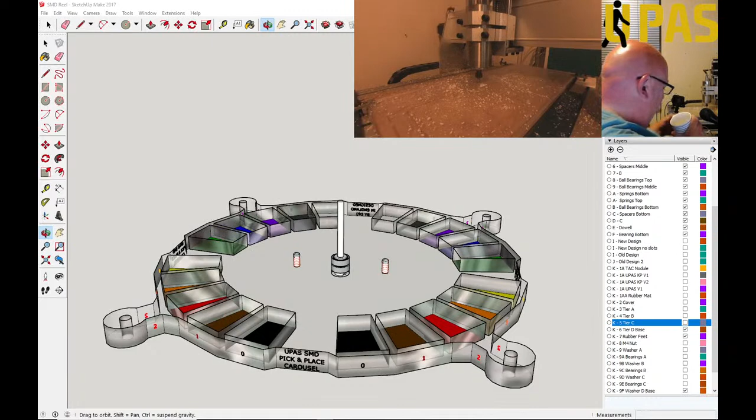I'm getting splattered with plastic. Yeah, getting a bit splattered with plastic. A little bit of tidying up after this, probably. Yeah, alright, let's give it a blast on the vacuum.

Okay, I don't know what stage it's doing at the minute. Still milling it down, I think, to the 10mm. Horrible smell.

Well, it certainly looks deeper than 10mm, put it that way. I'm hoping there's a bit of base left to it, otherwise we're going to have a hole in the bottom.

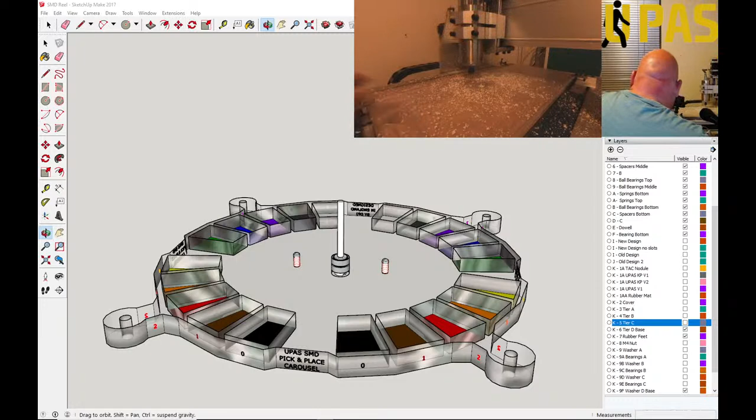Okay, I'll have a sneak peek. Well, the good news is we've got some material left at the bottom.

It's smelly, it's a bit smelly. Yeah, a bit smelly. I better go and put the extractor fan on, I think.

Yeah, so it's done the first one okay. A few more to go. One down, 19 to go.

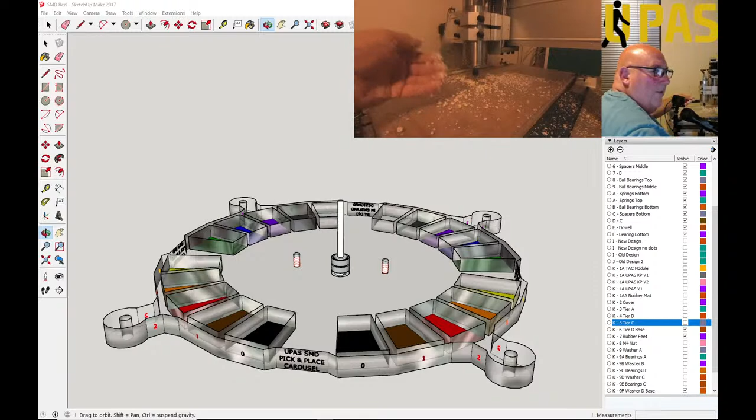I have slowed the feed rate right down. It's capable of milling this a lot faster than what it is, but I don't want to push it. You get more noise, and you know, can smell the plastic a bit. Yeah, it's horrible stuff, yeah. It reminds me of back at school when we used to make stuff out of plastic in them days.

So it's, I don't know what it is. It's oily stuff. Could be poisonous, couldn't it? Better not breathe it in.

Right, I have to put the vacuum on again. So anyway, what I might do is I might have to end the stream.

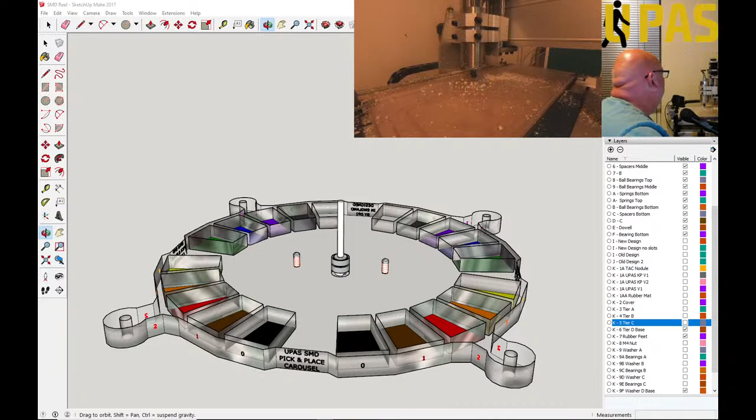It's just going to be more of the same till I make this one. So what I might do is just finish it off there, and that's an hour and 17. We're just at that point. So we've started the milling process, so it's just a matter of time now.

It's just about time now. Just keeping an eye on it and let it do its business.